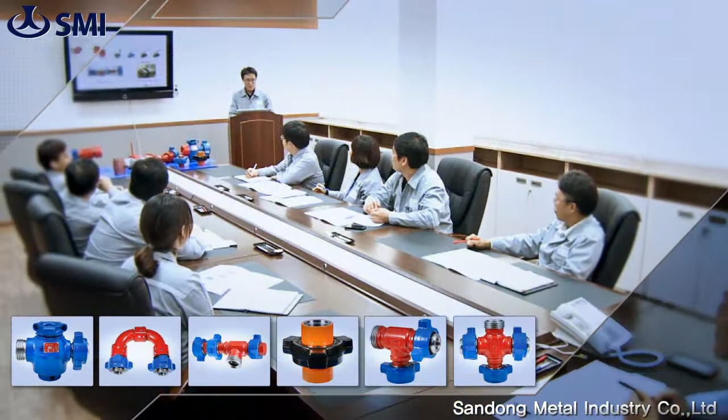We, SMI, acknowledge the technology from overseas and domestic through the development and products of oil field and motor parts, and have accomplished brilliant growth as a global company exporting oil field development equipment around the world.

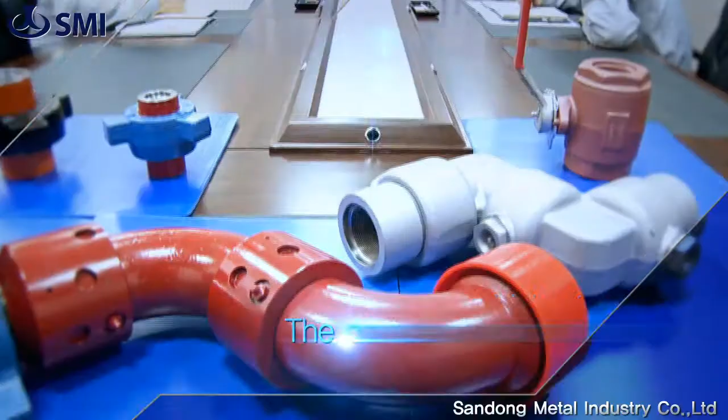Our business policy, with enhanced quality and keeping fixed dates, is connected to our quality policy that puts customer satisfaction as our first priority and aims for supreme quality, so that SMI has been a trustworthy company realizing 0% customer complaints and offering not only the best items, but confidence.

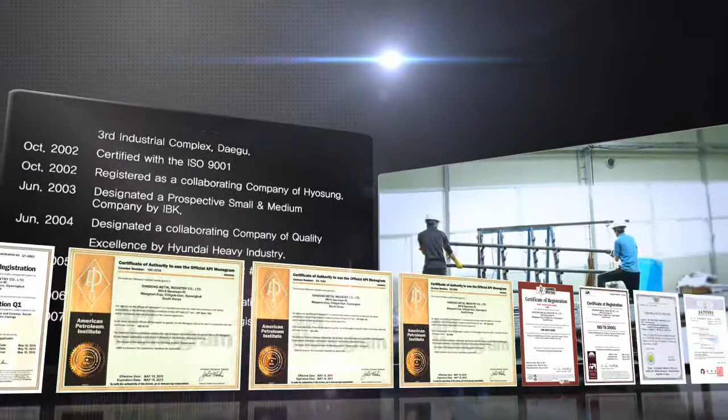Since the establishment of SMI in 1998, SMI has accomplished brilliant growth through constant development of technology and expansion of production lines. SMI's ability to produce and offer oil field equipment with a one-stop production system manages overall product lines, such as raw material, design, machining, test, and completed items, and it shows SMI's future.

SMI has been growing on our slogan, with challenge and innovation to the world and future, suggesting differentiated business strategy to build up a leading company in the world.

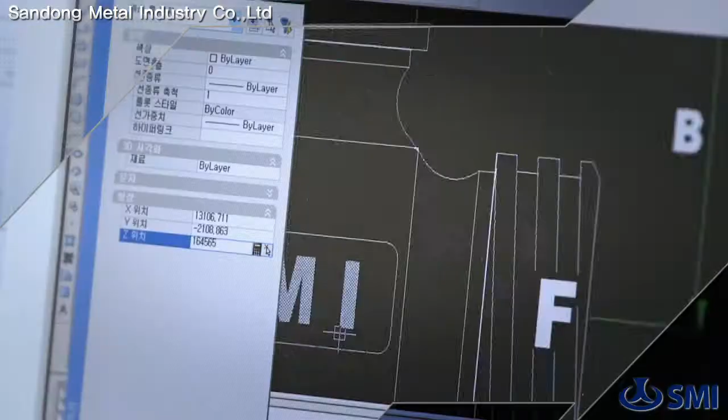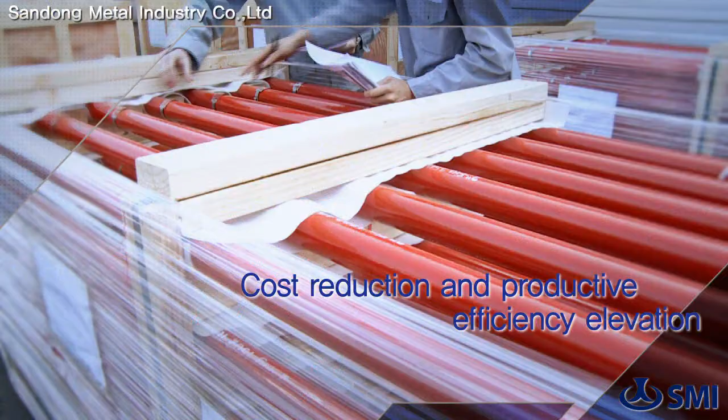Satisfying customers' requirements, SMI takes competitive advantage using in-house design capacity to meet a variety of customers' requirements. With increased production through manufacturing system upgrades and laborers' efforts, SMI realizes cost reduction and takes competitive advantage for this global age.

Setting direct export lines, SMI implements the Blue Ocean strategy, exporting items that are assured quality and taken price competitive to the oil-producing countries.

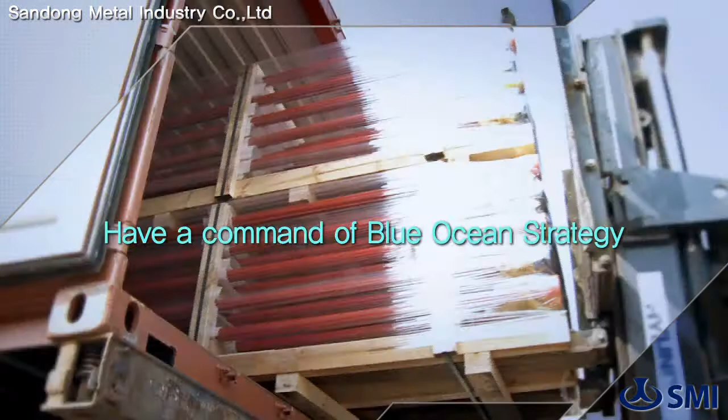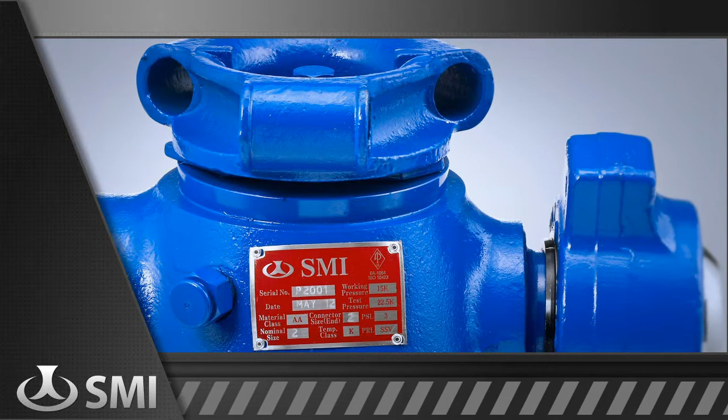The category of SMI products contains high-pressure valves and flow line items for export, and motor parts for domestic use. All items are forged, consisted of stainless and alloy steel, so that they show high-end safety performance in high-pressure circumstances.

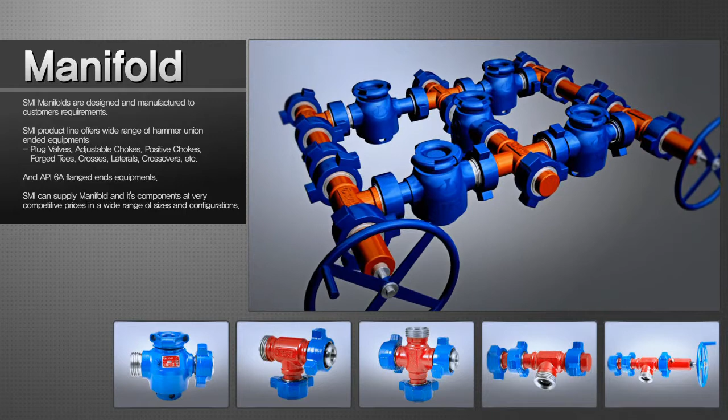Manifolds are consisted of elbow, fittings, and choke valve assembly, and SMI designs manifolds as per customers' requirements, offering our customers diversity.

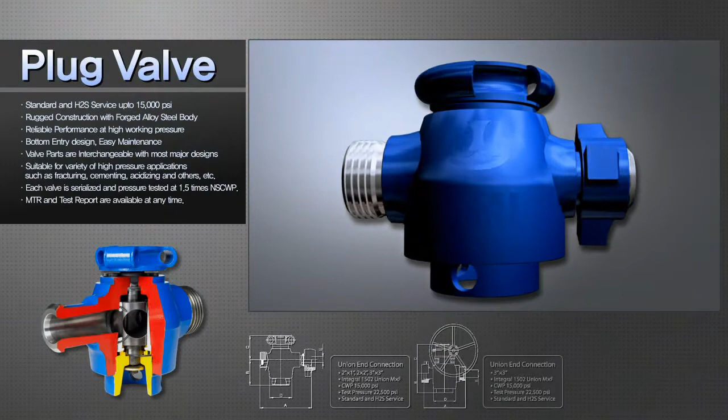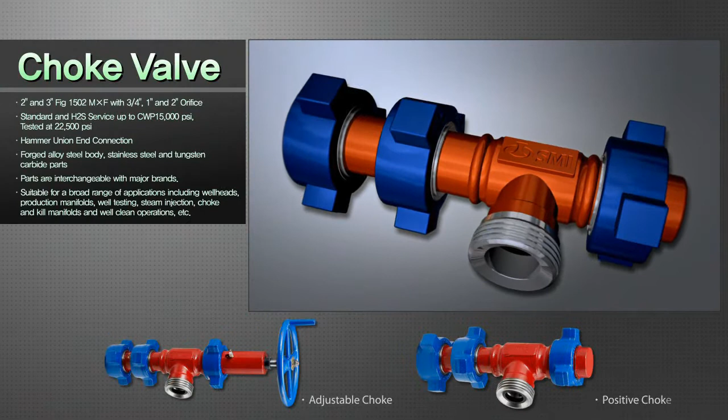Plug valves are usable in 10,000 psi to 15,000 psi pressure circumstances, and work for standard service and sour gas service. Choke valves are usable in 15,000 psi pressure circumstances, and work for standard service and sour gas service.

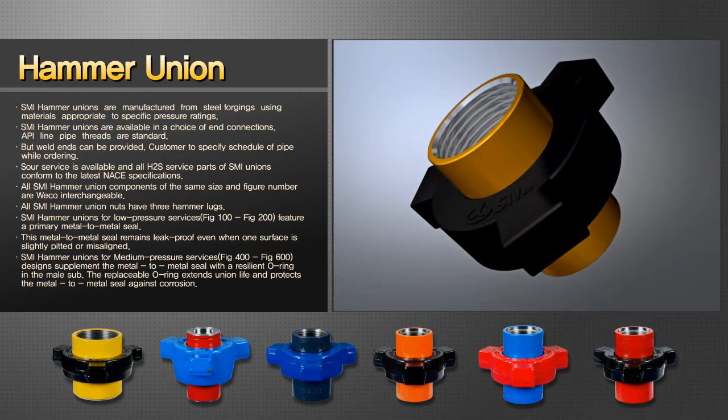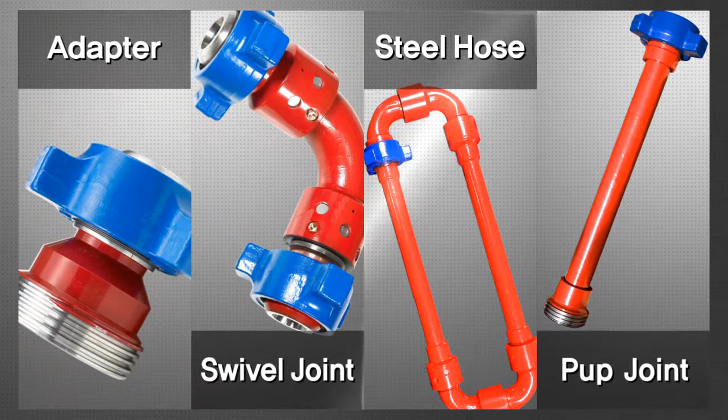Hammer unions are produced with proper forging materials for each pressure, assuring uniform quality. Besides, SMI designs and produces many items for oil field equipment, such as adapters, crossovers, steel hose, pup joint, swivel joint, and so forth.

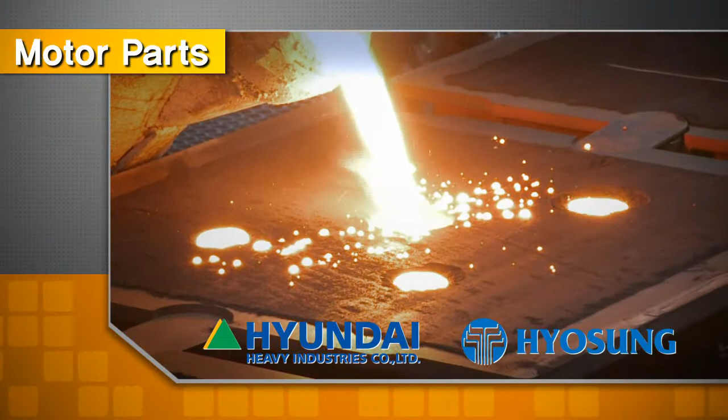The know-how from producing industrial motor parts that have been supplied to well-known companies such as Hyundai Heavy Industry and Hyosung Heavy Industry is equal to SMI's history. Based on this know-how, we will do all our efforts to continually supply better items.

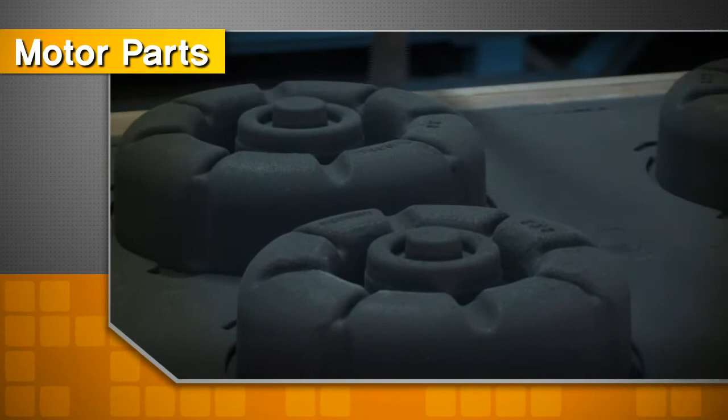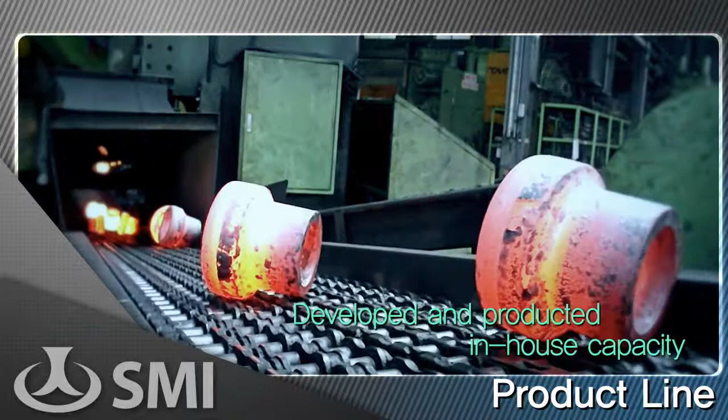We are doing our best to keep promises to customers, minimizing faults that might occur, and being equipped for producing and maintenance simultaneously.

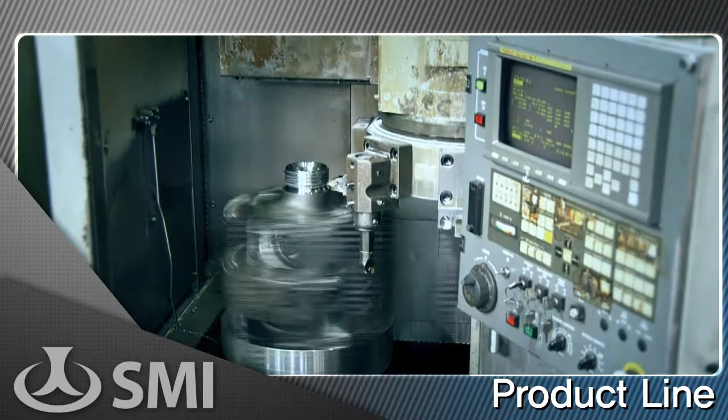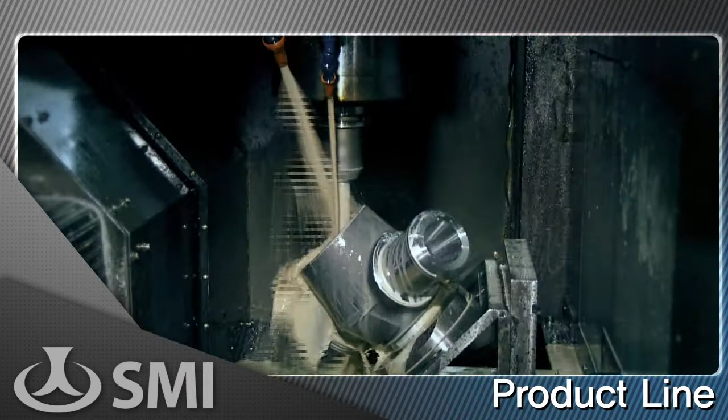SMI also educates all employees in safety and equipment operating, so that employees can work in a safe environment and their equipment operating skill has been improved. This shows SMI's human-centered philosophy that regards human ability more than equipment superiority.

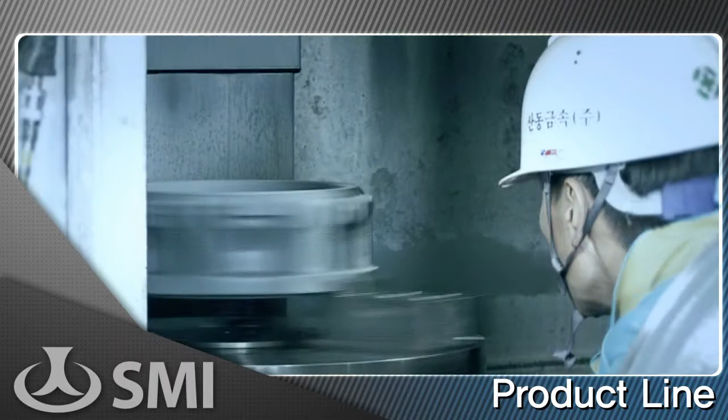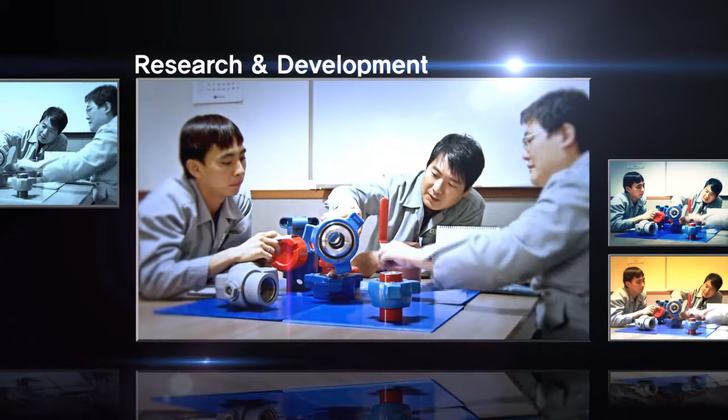SMI knows that only technology development and quality innovation, not remaining as it is now, can build up a better future. So, having founded an exclusive division for technology and experiment, SMI has investigated the way of overseas market occupation through self-development of a material control system with the quality management division.

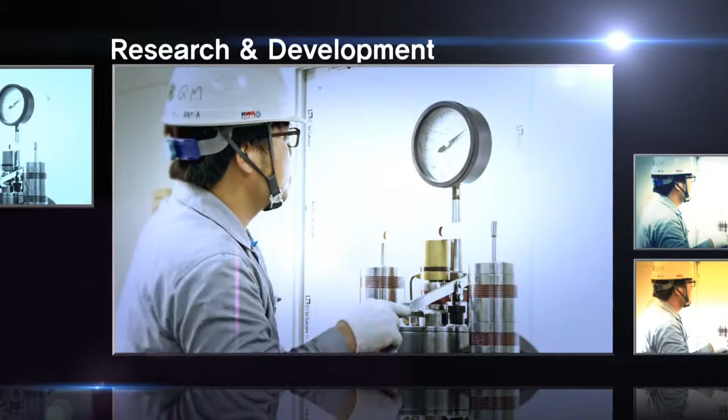As a result of these efforts, our sales have been growing, and the company's volume and number of employees have increased. We know a company is not operated by one man. In SMI, we work together, not in a vertical relationship, but a horizontal relationship, because we know a company can develop when we respect and understand each other in a harmonious mood.

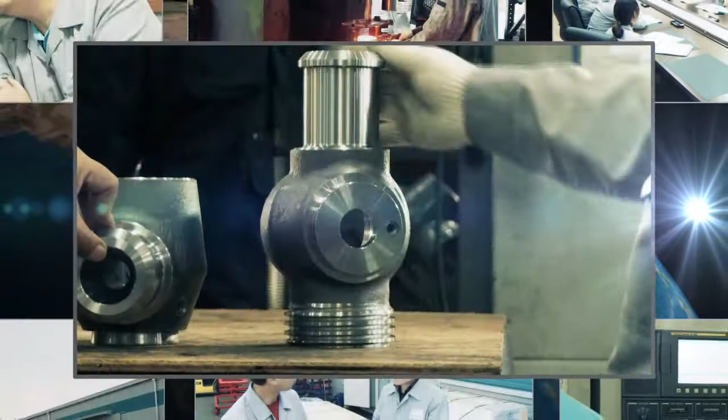Human-centered company SMI has done all its efforts to give customers trust and impression. In the future, showing our growing business, we will continually do our best to give all customers the best quality products and faith.

The number one global company of motor parts and oil field equipment. It is SMI.